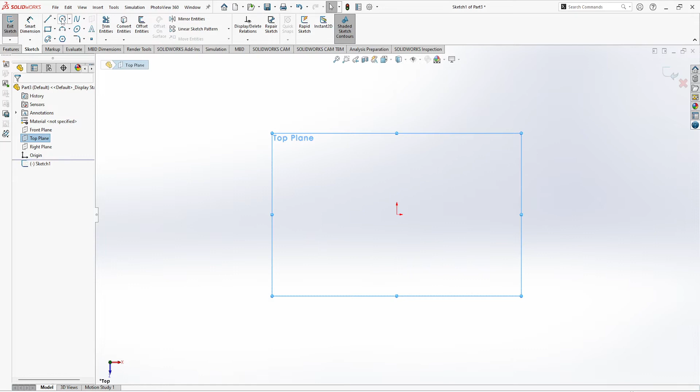Go for the plane, go for the sketch, draw a rectangular shape here. Go for the features, extrude the boss base. That means we are using the extrude feature part.

Now if we go for the revolve boss base, what do we have to do? We have to draw. Let's see what we can do.

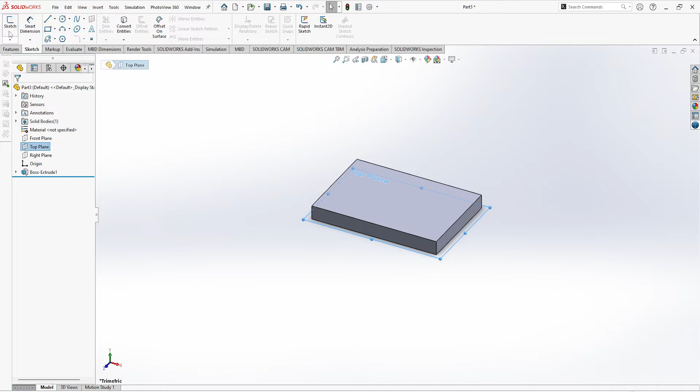If we go for sketch one, go for the sketch. We haven't selected any plane, so go for the plane. And if we draw a rectangle over here, and go for the revolve boss base and select this line, it will draw a cylinder along with that profile. We can see that it's drawn.

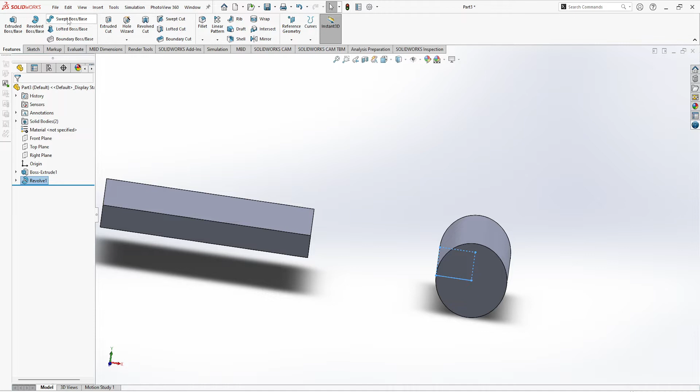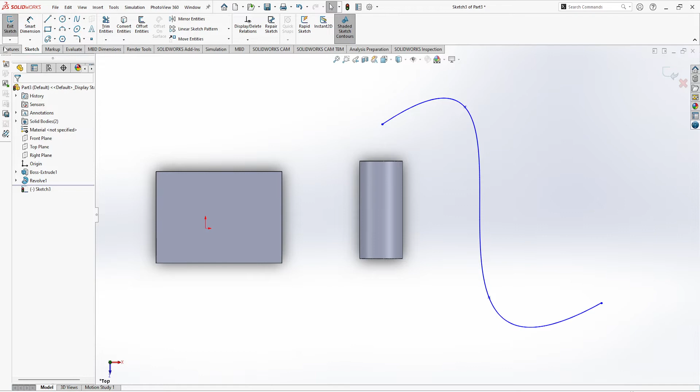Now for swept boss base, we have to draw a spline tool. For that we go for a sketch. We didn't select the plane. For the sketch, now what we have to do is go for the spline. Let's draw a little bit. Go for features, swept boss base, select the profile.

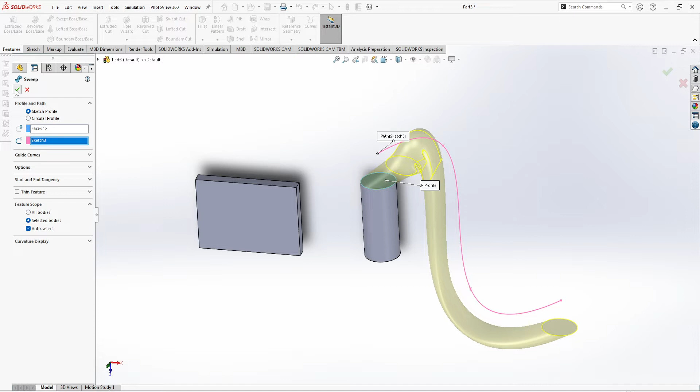A profile and a path must be provided to define the swept feature. So the profile will be this one and the path will be this one. Let's see, so this profile, this circular part, is drawn along with this line. You can see that. So this is the swept boss base. It's looking like a handle now.

Now if we go for the lofted boss base, we can see that it adds material between two or more profiles to create a solid feature. The first, last, or first and last profile can be points.

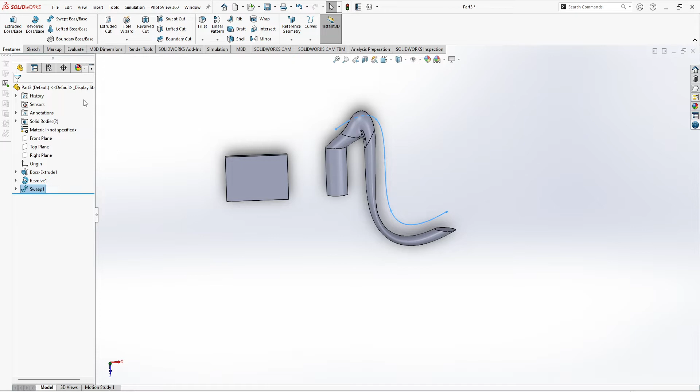So if we go for this, what we have to do is select this one. First we have to select a profile, and again we have to select the profile. Let's suppose this one is this, and you can see that this is showing... let me zoom out. Yeah, you can see that these are showing a lofted joint between these two planes.

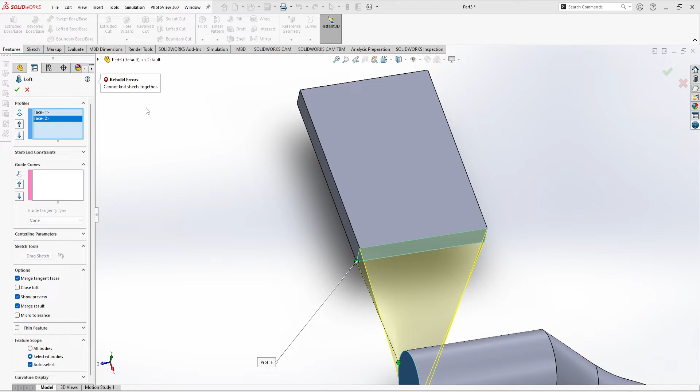If we hit OK, cannot knit sheets together. It's because it's not in the same plane, actually in the same shape.

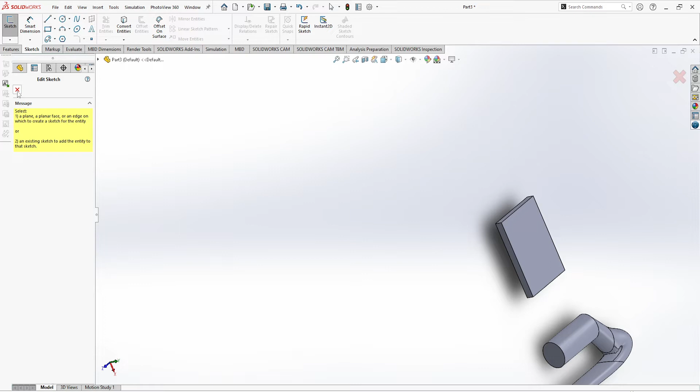If you go for the sketch again, let's go and draw a circle over here, or yeah, you can do that. Let me once bring it to the, yeah.

If we go for the top plane and sketch, and if we draw a circle over here, let's suppose this one, and if we go for the... again we have to draw a circle over here, and go for the loft, where is the... sorry.

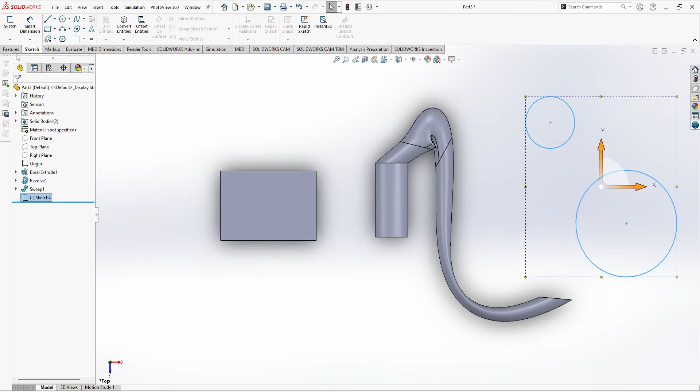Let me exit, go for the feature, lofted boss base, at least two profile faces. So first profile and second profile, select a continuous group of entities.

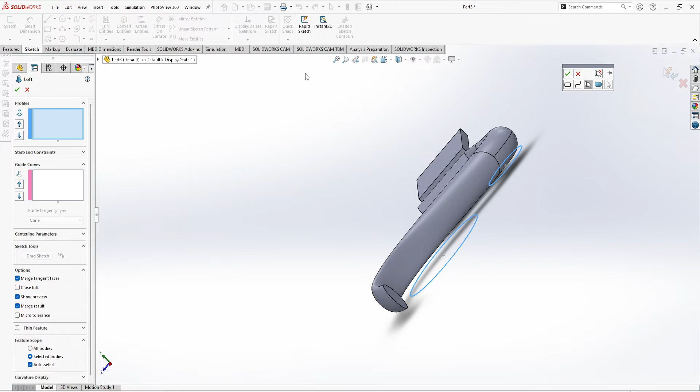For that we have to go for the sketch and make two different planes, one on top of each other, and then join the lofted plane. That's why it's not working currently. Let me do it for you, let me show you how we will do that.

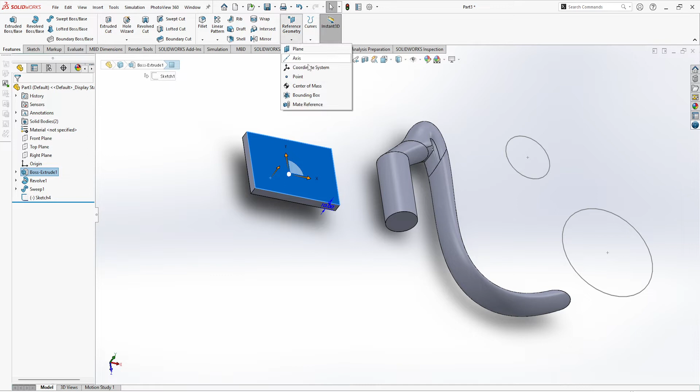Just go for select a plane, go for the reference geometry plane. It will show a reference plane on top of each. If you wish, you can... let's suppose we have drawn this, and let's hit OK over here.

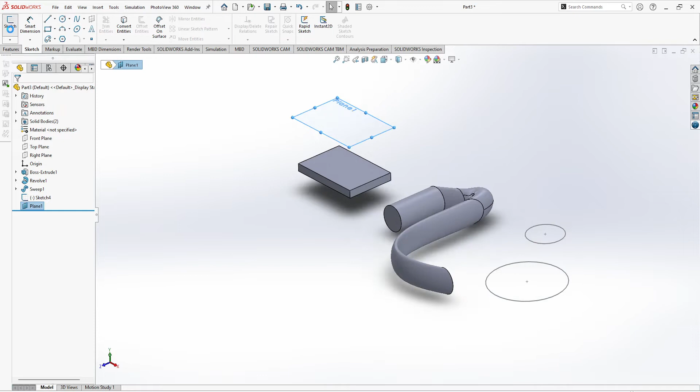Let's go for this plane and go for the sketch. If we draw, suppose, a smaller rectangle over here, and let's suppose what we have to select, we have to go for... actually let's select this one.

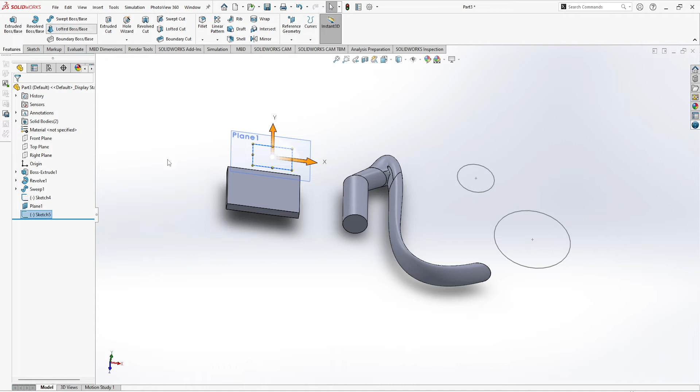Sorry, sketch, exit, features, lofted boss base, and the first one is selected, the second one I have selected also, and the guided curve will be... what will be the guided curve?

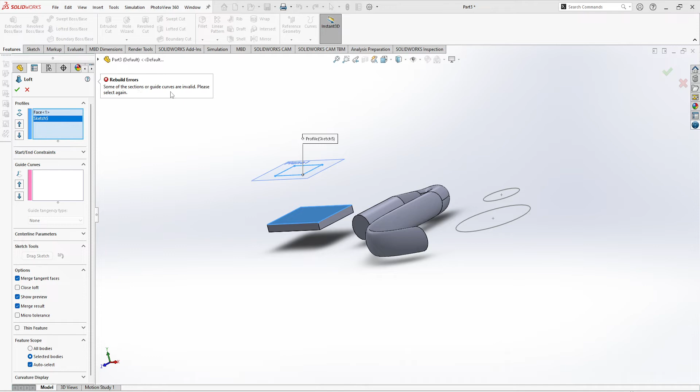What happened? Some of these section or guide curves are invalid, please select again. What happened to this now? There is no guided curve.

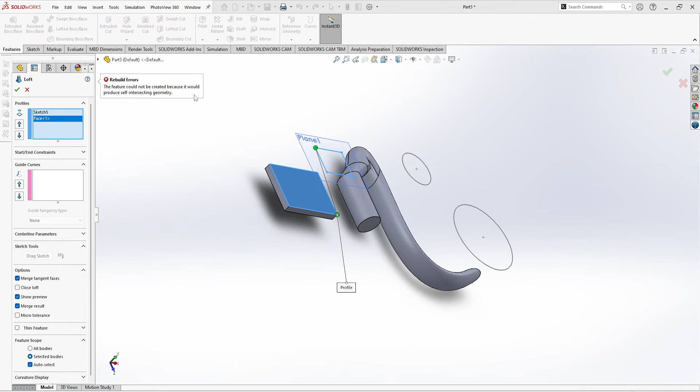Select lofted boss base. The feature could not be created because it would produce self-intersecting geometry.

Why it's not doing that? Okay, that's why it's not working. Actually we have to shift the profile, that's why it's not working. The endpoint was showing over there and there, that's why it was showing intersecting.

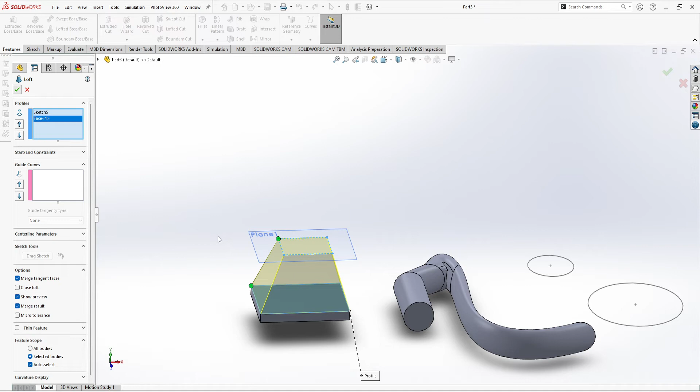Okay, if we hit enter, you can see that it's lofted the base over here. And if we want to draw a circle over there, we will see in future videos how we can draw lofted base along with the rectangle, triangle and circular plane. Okay, I will show it later.

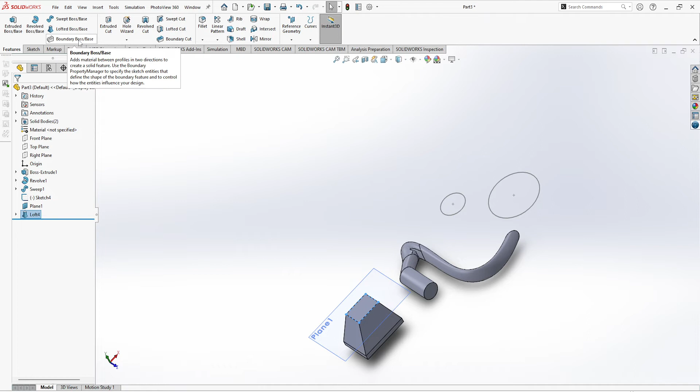And let's see what are left now. If we go for this boundary base, does it show that? Direction 2, error face 1. Leave it, I will show it in the future videos.

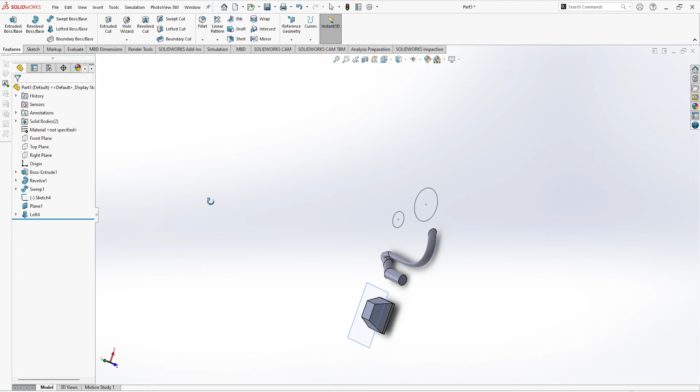And you have seen the extrude cut hole wizard. Let's see hole wizard. What we can do, we can go for this plane, select hole wizard. Okay, and let's suppose we select this one, go for the positioning, and let me zoom in here, then it will show clearly.

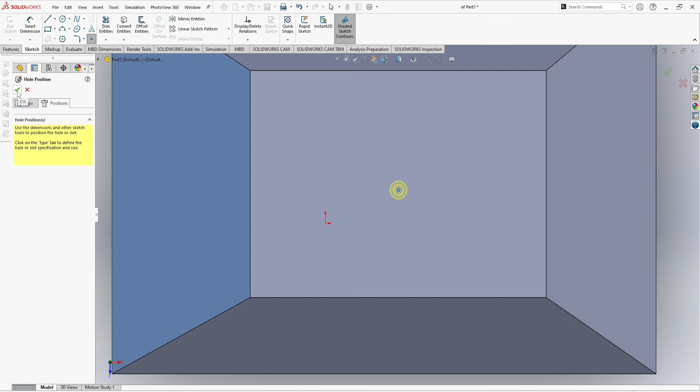If we just hit a circle here and click OK, you can see a hole is drawn through all, you can see through this. Okay, so this one is the, what type of hole is this? Tapered hole, am I right? Flat head tapered hole, okay, or flat head hole.

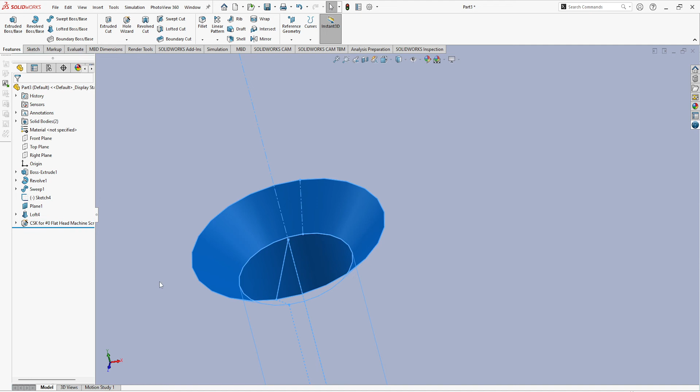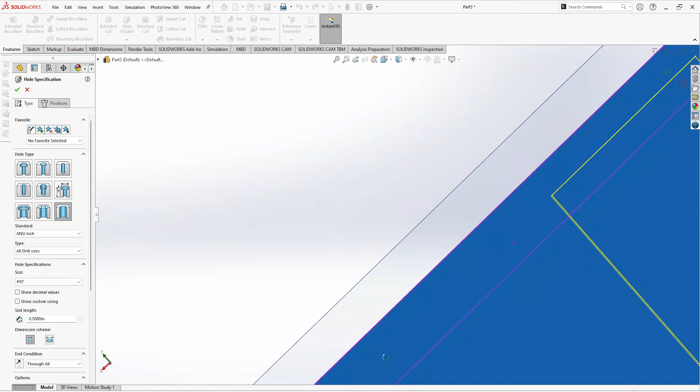Okay, if we want to change the type of the hole, just we can simply select from this. Okay, or let's see, suppose this one, or this one, or this one. So you can see that these are some types of hole we can draw through hole wizard. Okay, if we hit OK, the hole will be changed.

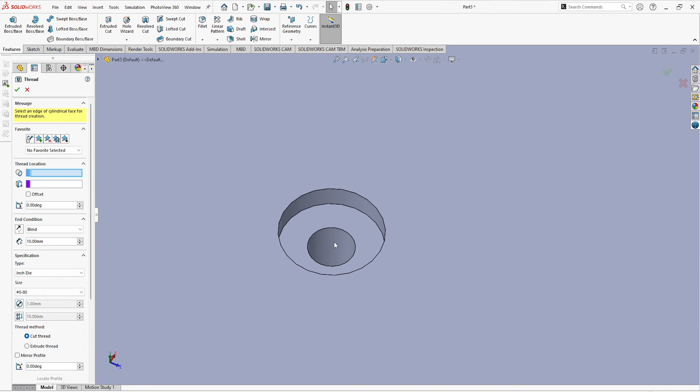And you can also select the screw method. And one more thing, we can draw threaded holes too. For that we have to just go for the threaded one, and we have to select a profile. This one is the profile, it will show a threaded hole inside that.

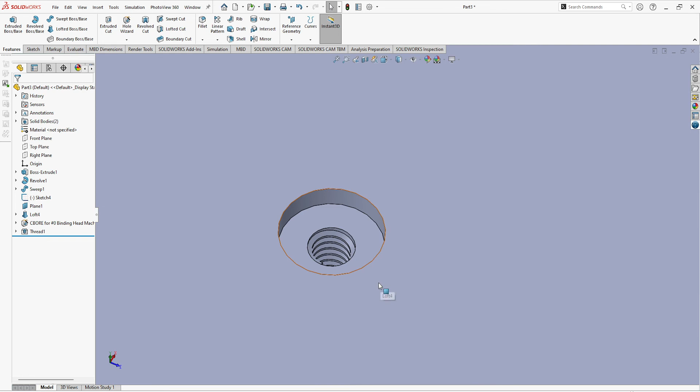Okay, if we hit OK, actually we have to extrude the hole because we have made the hole before. So extruded, then if we hit OK, it will draw threaded hole inside it. You can see that the hole is now threaded.

So that's all for today's video. We will see much of these things.

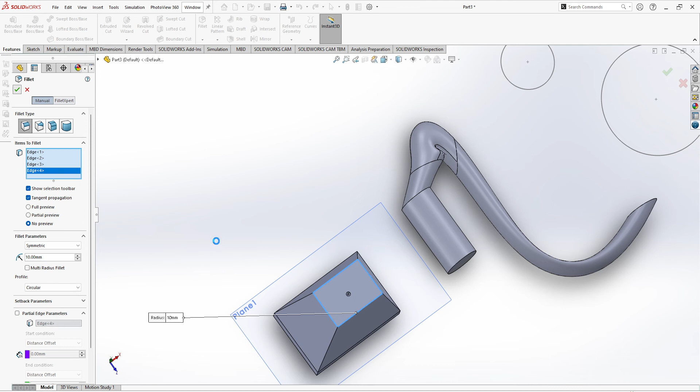Oh yeah, we can see fillet right now. For that just we have to select this one, this one, this one and this one, and hit OK. It will show it's filleted. Now you can see that.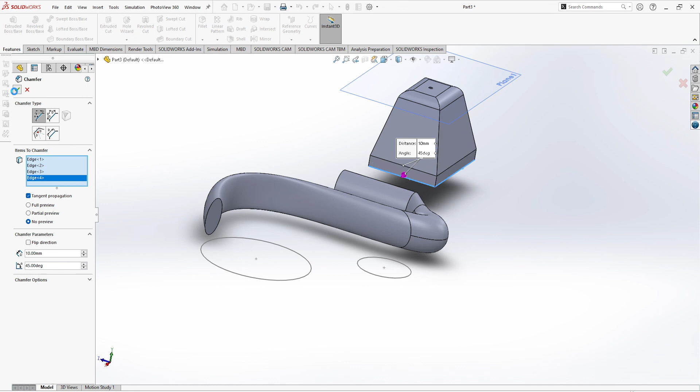If you wish to see chamfer, just go for this, select this one, this one, this one, and where the go, yeah, and this one. Let's chamfer it. Now it's chamfered, you can see that.

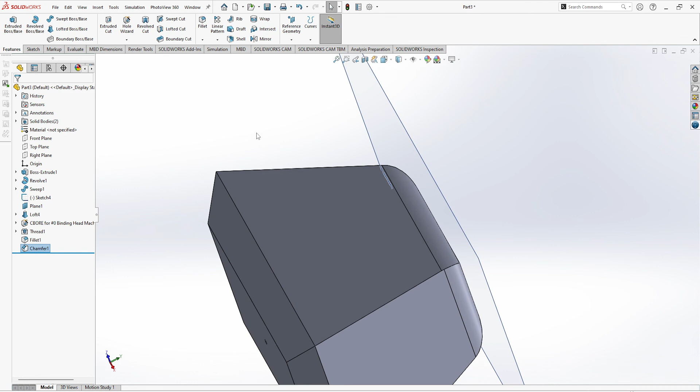Chamfer is simply the plain slided part, and this one is the rounded. It has a degree of rotation, and it has two different sides cut in. You know all that, actually, I think so.

Now, linear pattern, it has different types of patterns, so I will show these in future videos. So that's all for today. Thank you, and bye bye.